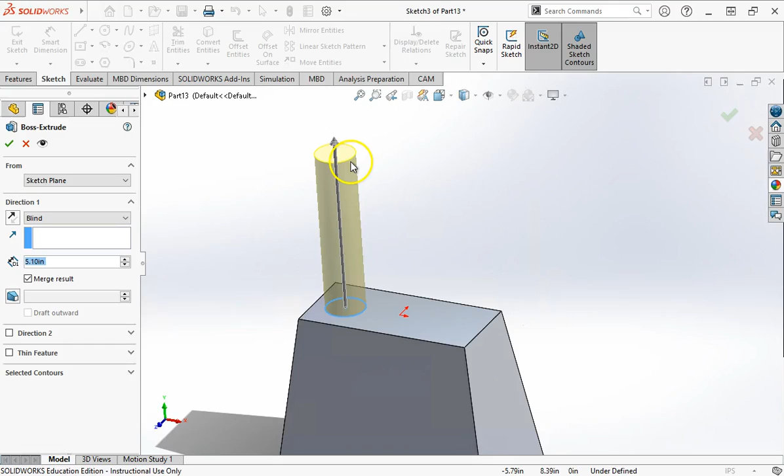But what we can do with a swept boss base is, instead of this shape just extruding straight up, we can change this pathway. We can make a custom pathway. So if we want this shape to go up and then curve and then come down, we could do different stuff like that.

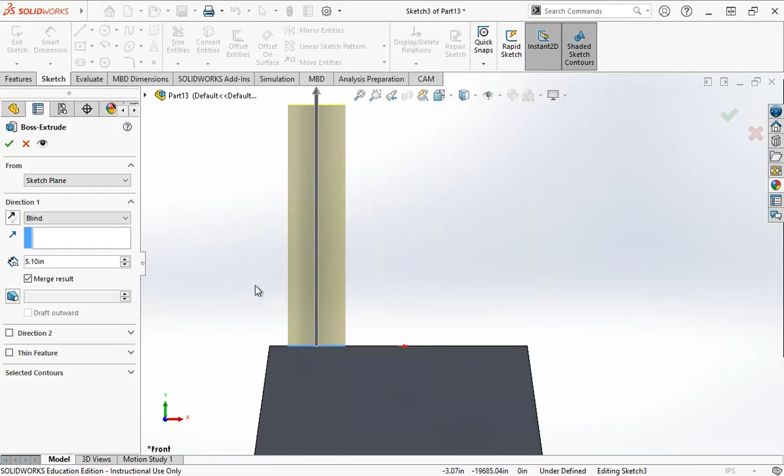What's different with this tool as opposed to just an extruded boss base is you're going to have to make two sketches. And those two sketches are also going to be on different planes or different faces. One of those sketches is going to be what's called the profile, which is the shape of what you're trying to extrude. In this case, our profile is a circle. And then the second sketch is going to be called the pathway.

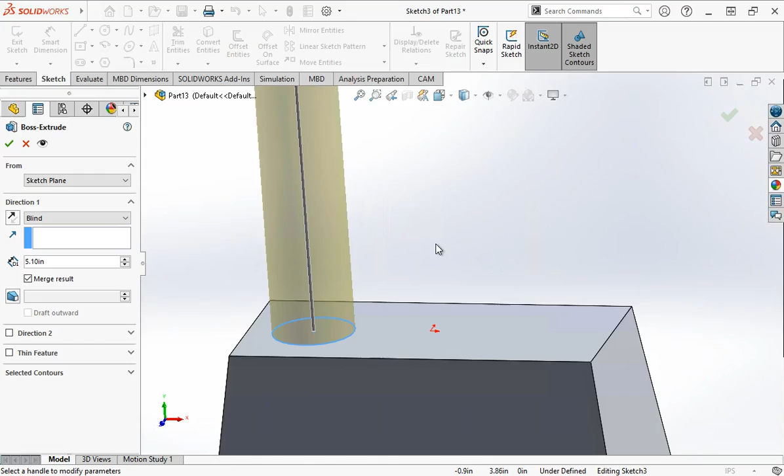Now the pathway is not going to be a shape. It's not going to be a closed loop sketch. It's simply going to be a line. You could use a line tool. You could also use a spline tool. You could use arc tools. And that second sketch is going to determine where your profile, your shape, is going to extrude. So, first of all, let me get rid of this sketch real quick.

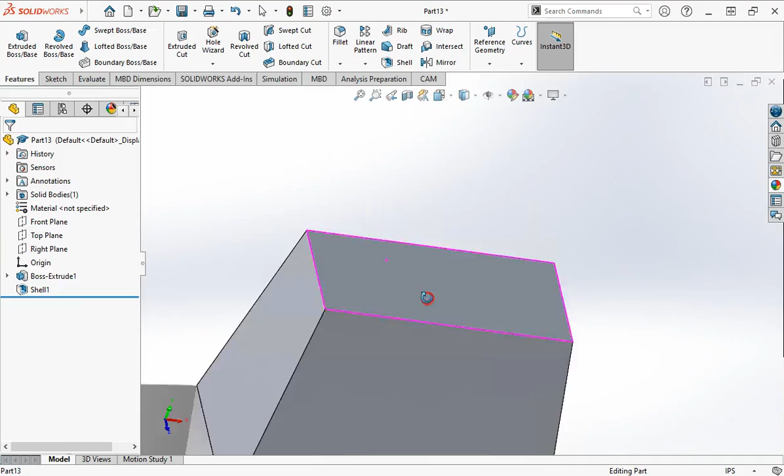What I'm going to do for this part is create kind of a handle on top of this part here. So like I said, we've got to do two sketches. The first sketch is going to be the profile, the shape that's going to extrude. Now, this one's a little different from extruded boss base or extruded cut because we're not going to go straight to swept boss base. We're actually going to click this button last.

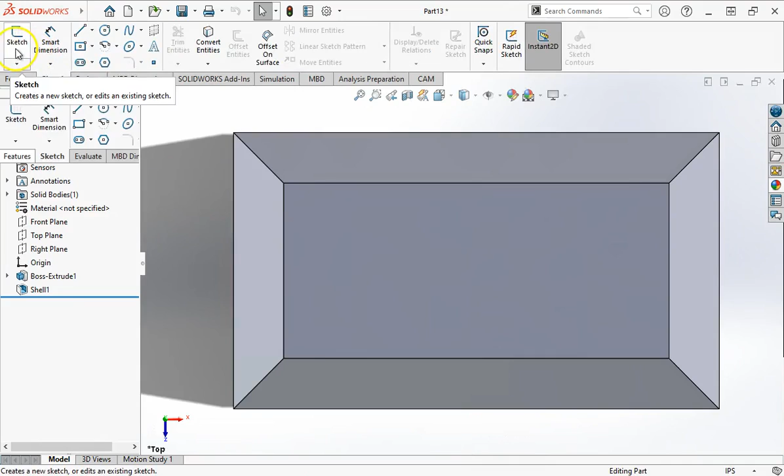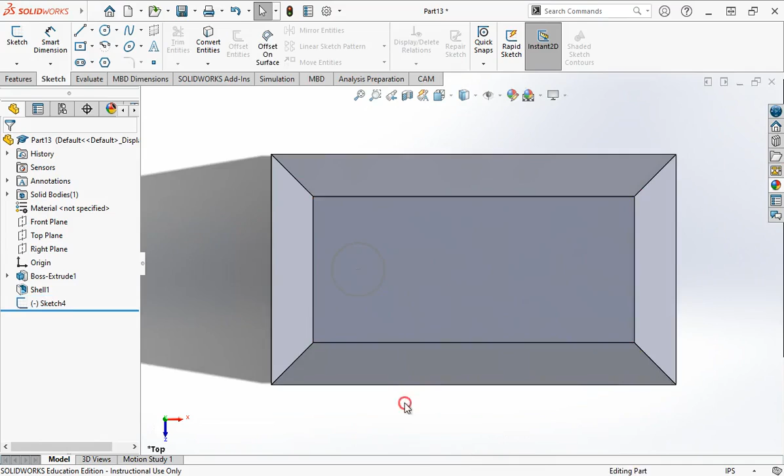What we're going to do differently is start in the sketch tab. I'm going to hit sketch, click on this top face, and this is where I'm going to draw my profile, which is going to be my circle. And then I'm just going to exit out of my sketch. Obviously you could add dimensions and whatever else you might need, but I'm going to avoid dimensions just to keep the video quick.

Okay, so I've exited sketch, and you see the circle just turned gray. It did not extrude, and that's normal. We don't want it to extrude just yet. Now the second sketch is going to be the pathway of the extrusion. You can't do it in the same sketch. You can't even do it on the same face. You have to do it on a different face,

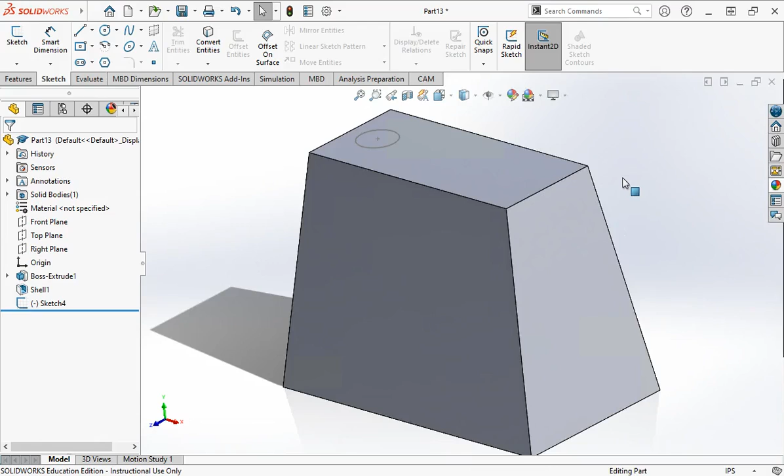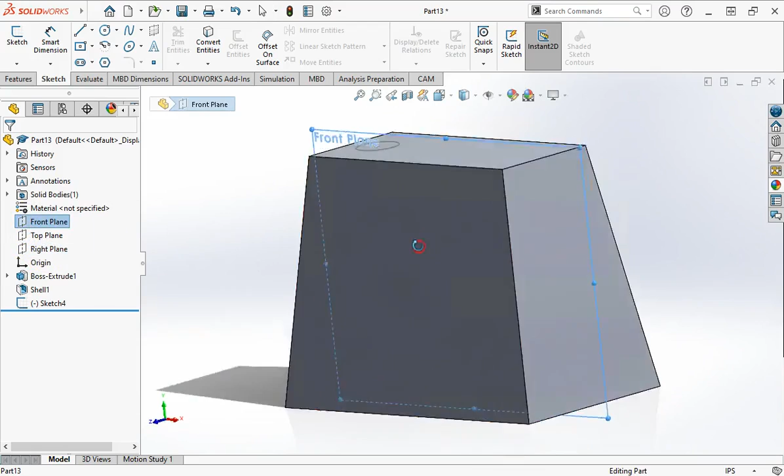most typically a face that is perpendicular to whatever face you used for your profile. So for example, we drew our circle in the top plane, so for our pathway we're going to have to draw it either in the right plane or the front plane. In this case, because I want the extrusion to go up and over here, I'm going to go with the front plane. So I'm going to select front plane, and then click the sketch button.

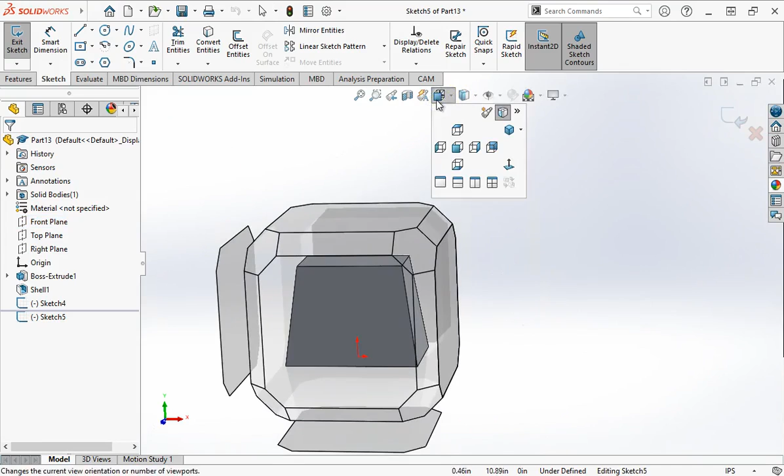So now I am sketching on the front plane, and I'm going to go ahead and change my view. Now, you do want to kind of spot where your profile was. It's not always easy to see, but I can see those little gray lines right there that turn orange when I hover over them. So I know this is where my profile is. That's where that circle is. And I'm going to start my sketch probably right at kind of the center of that.

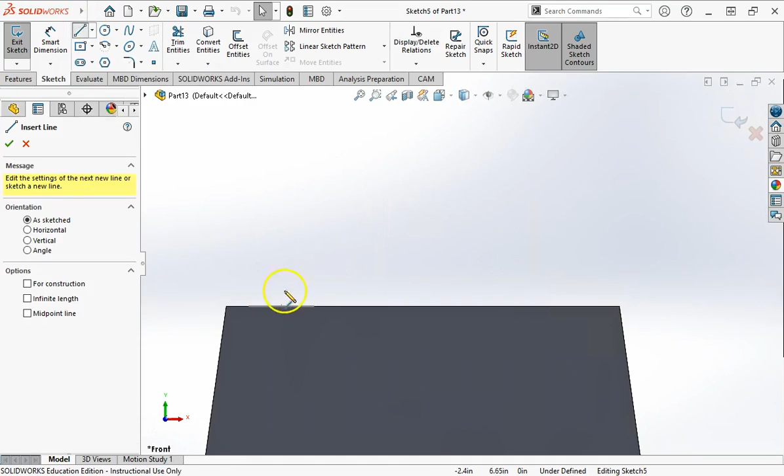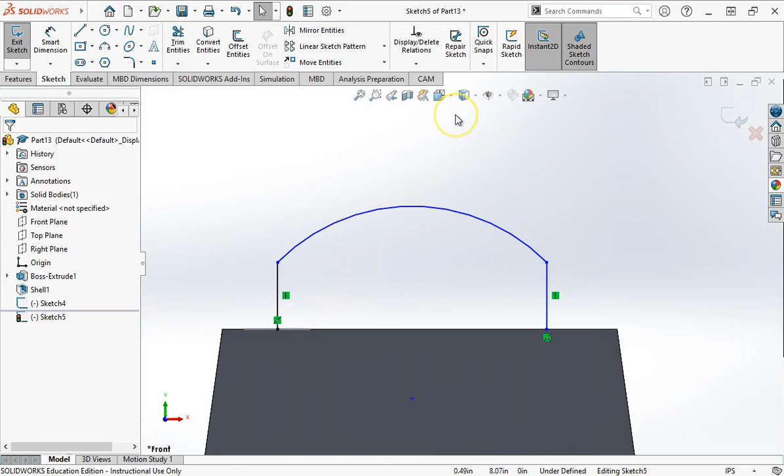So now I'm going to use a line tool, and I'm going to try and draw this profile here, and it'll kind of make sense once I finish it. And I'm going to go ahead and use a 3-point arc, and I'd say that looked pretty good. And you could do basically whatever line that you want to. If you just want to draw a circle and then draw a squiggly line, that circle is going to follow along that pathway. So I did a combination of line tool and arc.

Okay, so let's take a look at our sketch here. That's our pathway. It's not a closed loop sketch. It's not a shape. It's just a line. It's determining where that circle is going to extrude. So this circle is going to start by extruding upwards, but then it's going to follow this arc and then extrude back down into that shape. So I'm going to click Exit Sketch.

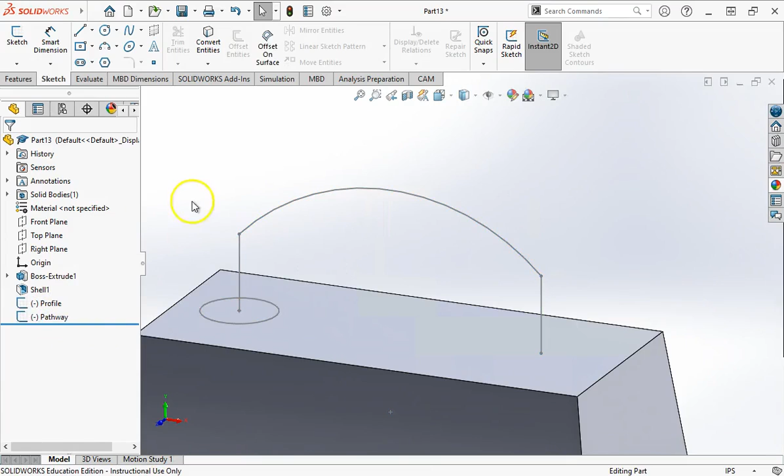So we got both of our sketches here. We've got our profile, and if I'd like to, I could even rename that to make it a little bit more obvious. And then this second sketch is our pathway. So now I am ready to go to my Swept Boss/Base tool. And the Swept Boss/Base tool is actually really easy to use once you get your 2 sketches done. All you have to do is fill in these 2 boxes.

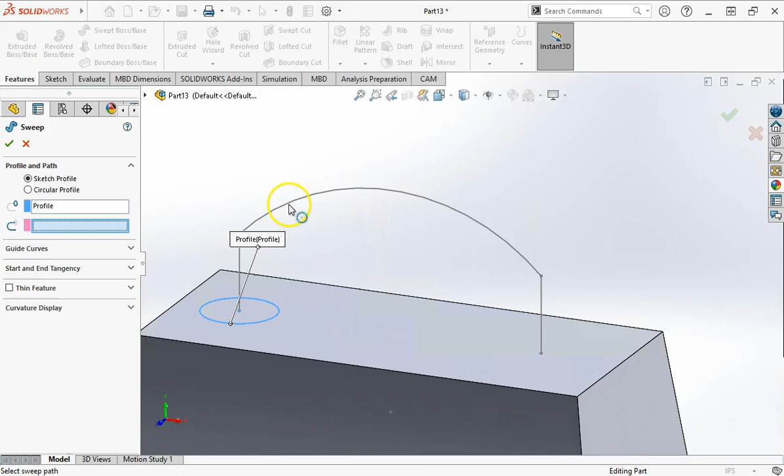The first box is asking you to identify the profile, so I'm going to click on our profile shape. And then the second box is going to ask us for our pathway, so I'm just going to click on our pathway. And what we can see is the circle extruded up, followed along this pathway and then extruded back down into that shape. And then I can just green check. We see it finishes just like that.

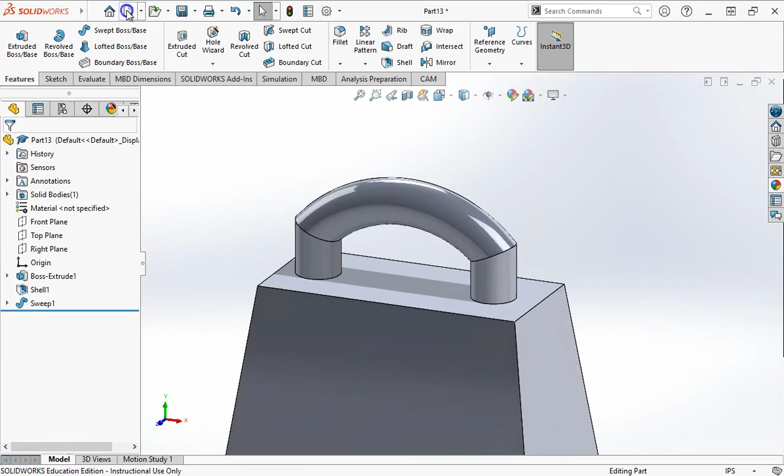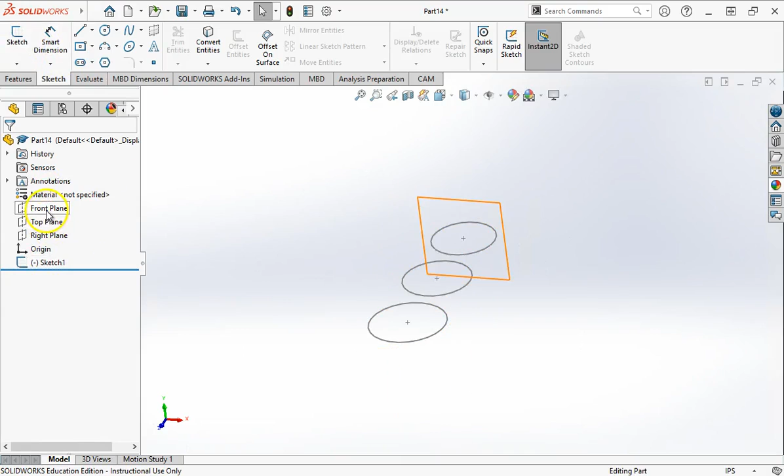And just keep in mind, you could use this same tool with multiple shapes. So if I just do a sketch, I could draw multiple shapes, and I can still use the Swept Boss/Base. So I did that in the top plane, so I'm going to go now to the front plane. And for this one, I'll just use a spline tool. Something like that. I'll exit out of my sketch.

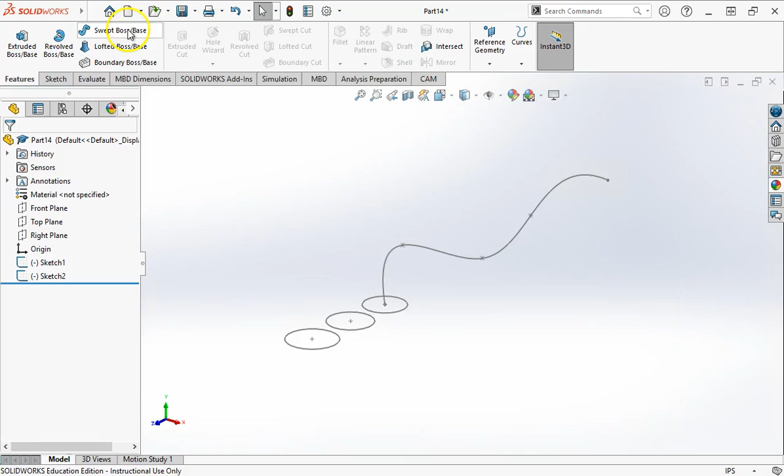All right, so once again, we've got our profile. In this case, our profile consists of 3 shapes. And then our pathway is going to be our spline. So we'll go up to Swept Boss/Base. We're going to select our profile sketch and then our pathway sketch. So just like that. You can do it with 1 shape. You can do it with multiple shapes. So hopefully this was helpful using the Swept Boss/Base tool.